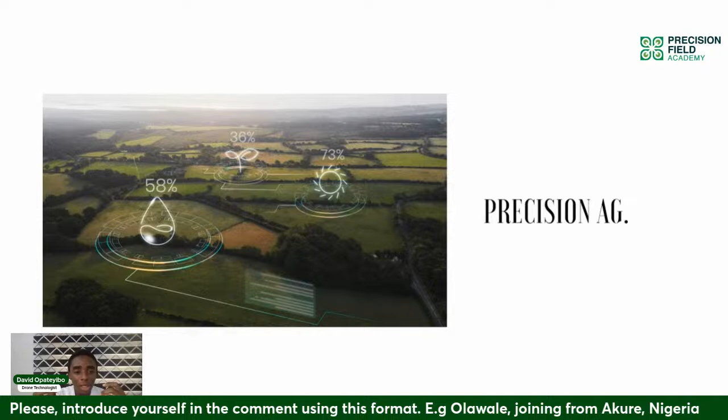Now, this begs the question of how do we meet the demands, especially since traditional methods of providing food cannot really cover even the demand that we have at present. And that's where precision agriculture comes in. Precision agriculture is the strategy that optimizes resources by leveraging technology to increase productivity. So when I say precision agriculture, the word might look vague, but really it just means you're using technology to augment or increase your productivity when it comes to agriculture or whatever it is you are doing.

Now, drones are an integral part of this, and they offer real-time data collection and analysis capabilities that allow farmers to make data-driven decisions and improve crop management practices. In the precision agriculture ecosystem, we have a lot of subparts, for example, Internet of Things, artificial intelligence, machine learning, and the likes. Drones happen to be one of those systems that are being used.

And according to a report by PwC, the market for agricultural drones is projected to reach about 6.21 billion naira by 2025, that's by next year. The demand for agricultural drones is projected to reach 6.21 billion naira. And the reason for this is the increase in adoption of precision agricultural procedures and also the advancements in drone technology.

Now, before we explore further, it's essential for us to understand what drones are and their evolution in agriculture. Okay, so that's what we're going to cover in this section.

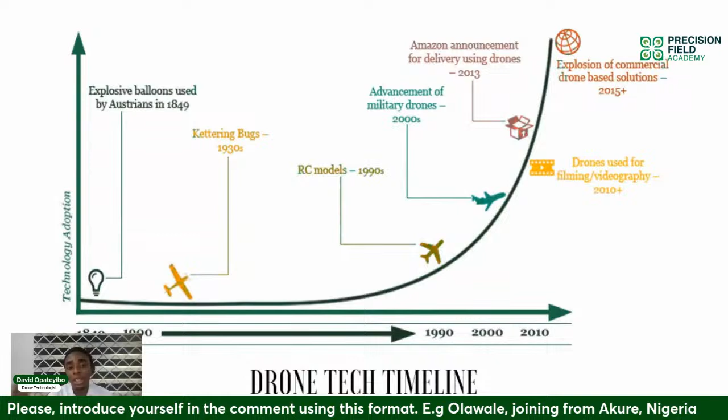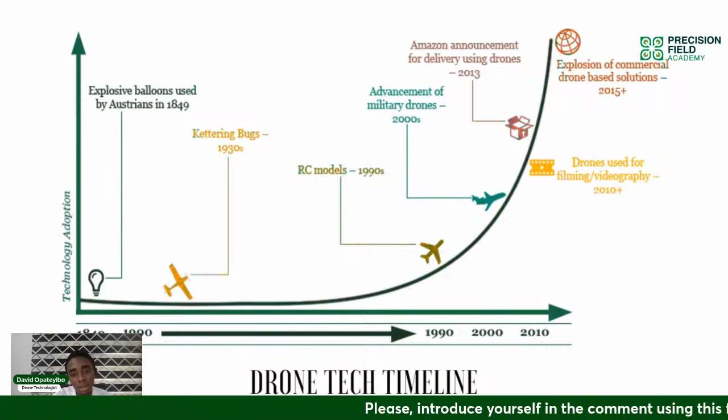Drones were first developed and used by the military in a variety of applications before they were adopted for civilian use, just like many other technologies we use right now, for example, the GPS on our phones. Many of these technologies first came up in the military before they got commercialized and started being used by civilians. So drones also fall into that same category.

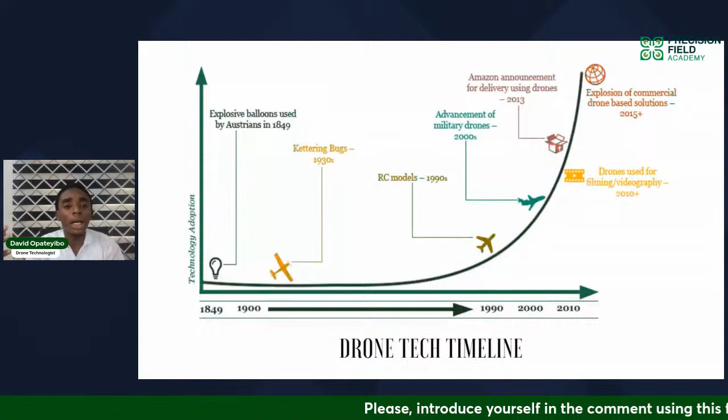Drones started gaining traction in the commercial space in the early 2000s, and since 2015, there has been an ever-increasing demand for drone-based solutions. So it started out in the military around 1849 onwards. Then until 2004, people started using drones for commercial use and every other thing. But then the explosion of commercial drone solutions happened in 2015. Interestingly, drones have been used in agriculture since the early 2000s also, mainly for aerial imagery and mapping.

Now, drones come in different shapes and sizes, and this can be categorized into four. So when we talk about drones, I'm very sure if you've seen any drone before, you notice that one drone looks different from another. Maybe you saw someone using one in a location, and then you saw another type, and you're wondering why all these differences. So it's true that we have different shapes and sizes, but no matter the differences, they can be categorized into four based on their mode of operation.

Sorry, can you see my screen? Yes, David, we can see your screen. Please let me know if you can still see my screen. Yes, I can still see your screen. Oh, I can see your screen. Okay, are you trying to move it? All right, no, my mouse was seizing. All right, so let me just start over, sorry about that. Let's go to— Okay, it's off the screen now. All right, let me just make an adjustment. Sorry about that.

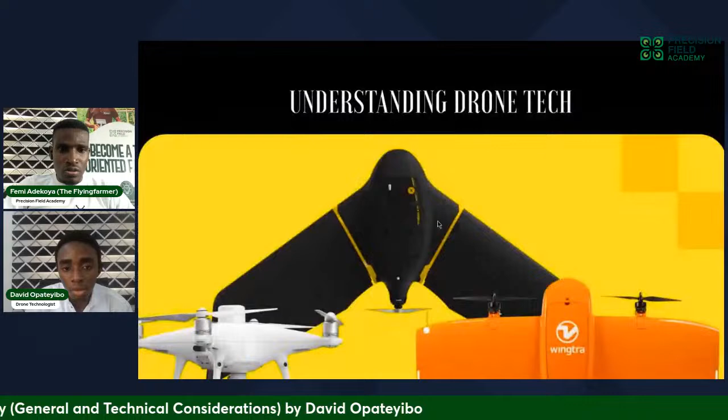So, like I was saying, these drones can be categorized into four different categories based on their function. And they are the fixed wing drones, which is what I'm pointing to now. These drones look like an airplane or fly like an airplane.

We also have the rotorcrafts, which are drones that fly like a helicopter and look like a helicopter. Another one very common in the economy right now is the multi-rotor drones. And then we also have what we call the hybrid drone, which is basically a fusion of fixed wing and multi-rotors. Now, these categories of drones all have their advantages and disadvantages.

For example, fixed wing drones are ideal for large-scale farming due to their longer flight time, while on the other hand, multi-rotors are highly maneuverable, making them effective for detailed mapping in smaller fields.

So there are several options available out there for agricultural operation. But it is crucial to consider a lot of factors when selecting the drone you want to use, including the farm size, the terrain, and the exact task you want to carry out.

Companies like Precision Hawk, Parrot, and DJI, among many others, provide drones specifically for agricultural use. For example, Precision Hawk provides fixed-wing and multi-rotor drones for agricultural applications like crop scouting, farm mapping, and yield monitoring.

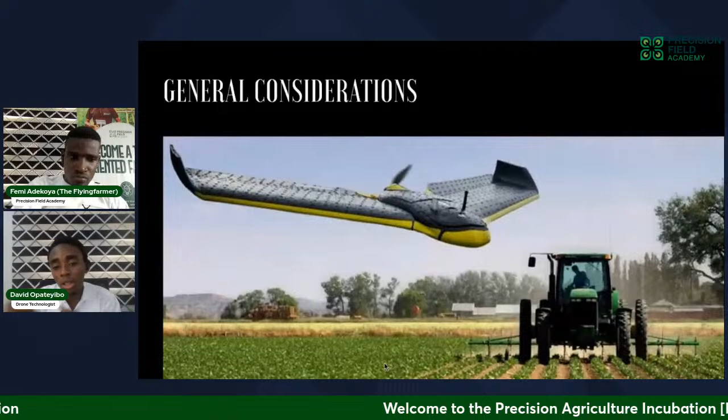One of the critical aspects of using drones in agriculture is navigating the regulation framework. Drones fall under what we call aircraft, and that's under the aviation industry. And in the aviation industry, there are laws that people need to abide by to operate aircraft or flying machines and the likes.

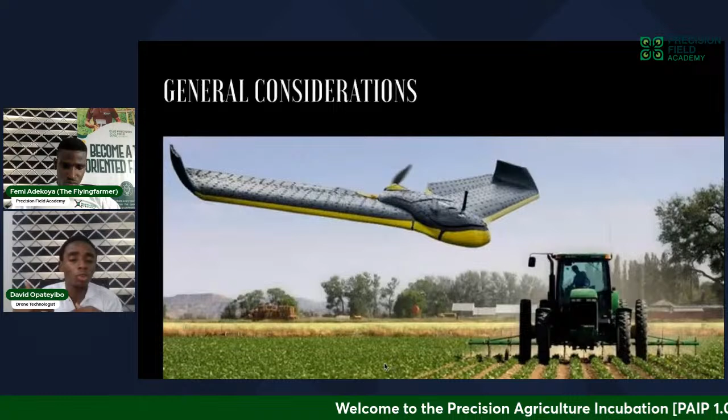So understanding these rules and regulations governing drones is crucial for compliance and for safety. You don't want to be on the opposite end of the law. So you always want to be law abiding when it comes to your operations so that you don't have any issues. And that's why we're going to first consider regulations.

So, regulation frameworks vary from country to country and from region to region, with rules governing stuff like your drone operation, your flight altitude, safety standards, licensing, among many other things. Now, here are some general rules guiding drone operations globally. Even though there are differences, some of these laws apply globally.

For example, you cannot fly your drone above 400 feet, that is 120 meters above ground level. So if you need to fly your drone above that altitude, you need to request a waiver or permission to do that.

Another thing is you're not allowed to fly close to airports or in restricted zones like a president's lounge and every other thing, where we have high dignitaries, or where we have wildlife, in some instances trade zones or where aircraft operates with a high rate of commercial aircraft operations. You don't want to fly in these particular locations.

We also have regulations for registering your drone if it weighs above 250 grams, getting a commercial pilot license if you are using drones to make money, among many other things.

Now, the Federal Aviation Administration, which is called the FAA, is responsible for regulating drone operations in the United States of America. Their law is called Part 107, and it requires pilots under that framework to get their license, their pilot certificates, and then follow airspace restrictions and regulations.

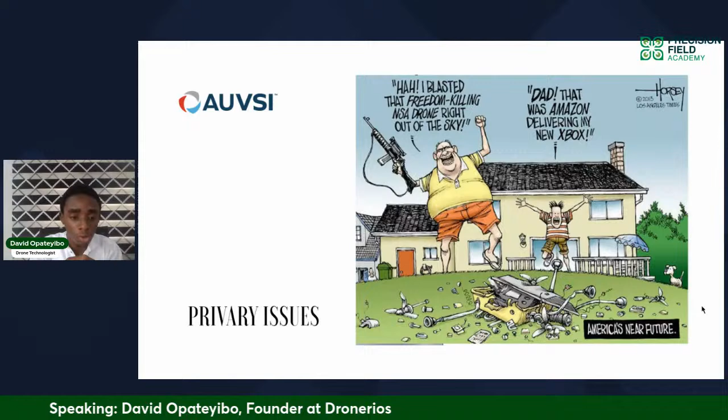According to a study by AUVSI, the Association for Unmanned Vehicle Systems International, over 80% of drone operators believe that complying with drone regulations has a positive impact on public perception and acceptance of drone technology. These laws are put in place not just to safeguard the community, but also to safeguard you as a pilot, and to allow the drone industry to boom and grow as it's supposed to.

Now let's delve into technical considerations, the technical aspect of drone technology. The very first thing you need to know is that another name for drones is UAV, which means unmanned aerial vehicle, simply because there is no human being inside the drone. The pilot who operates the drone does not stay inside, but operates externally.

These drones, the UAVs, are part of what we call the unmanned aircraft system framework. In this framework we have the drone and many other accessories, including your navigation system. So you have the drone, and you need something to control it, for the drone to navigate you have a navigation system, and you have your communication system to control the drone.

You have your data link that allows the communication system to speak with the drone, and your payloads, among many other things. The drone itself can also be divided into different parts, like the airframe, the propulsion system, the flight control unit, the onboard computer, the communication module, the payload, and also the power system.

For example, many drones operate with motors and are battery powered. We also have drones that make use of fuel and internal combustion engines, and drones that make use of hybrid electric power and hydrogen power supply. So there are a lot of systems or things that you need to put in place.

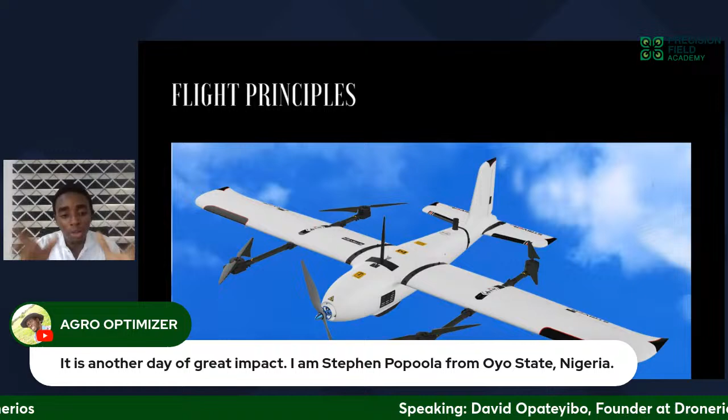At the heart of every drone flight, all drone operations you see out there are backed up by four fundamental forces. These forces are lift, weight, thrust, and drag. These forces govern how drones move through the air and maintain stability during flight, and together they are a subset of what we call basic aerodynamics.

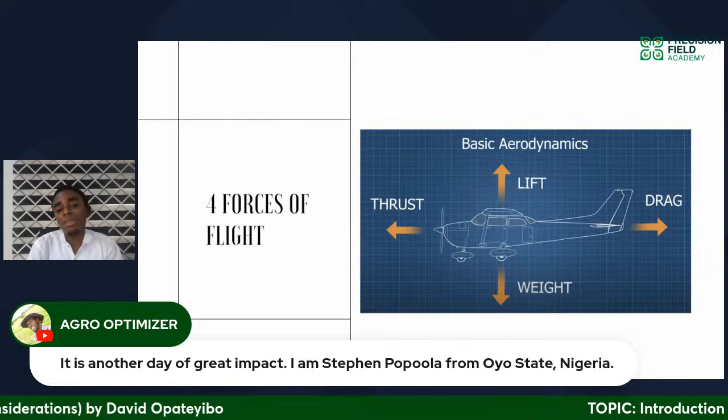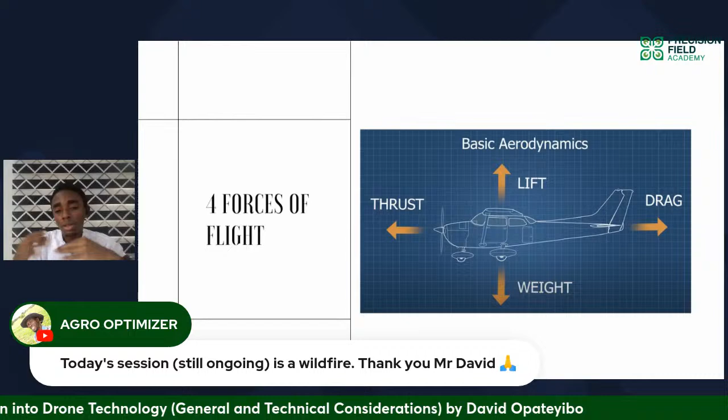Aerodynamics might sound strange to you, but it's simply the study of how objects interact with the air when they move relative to one another. For example, if I have a static object and air blowing through it, how do they interact? If I have calm air and an object moving through it, how do they interact? The study of how air interacts with an object is called aerodynamics.

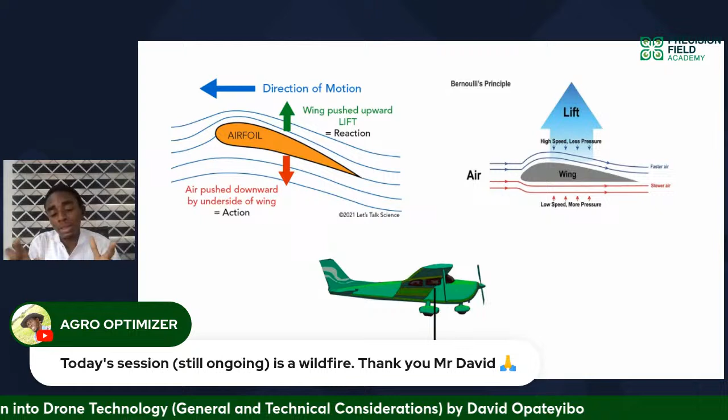So like I said, we have four forces of flight: lift, weight, thrust, and drag. Let's talk about lift. Lift, like the name implies, is basically the force that allows the drone to ascend, to lift off the ground, to overcome gravity and stay airborne.

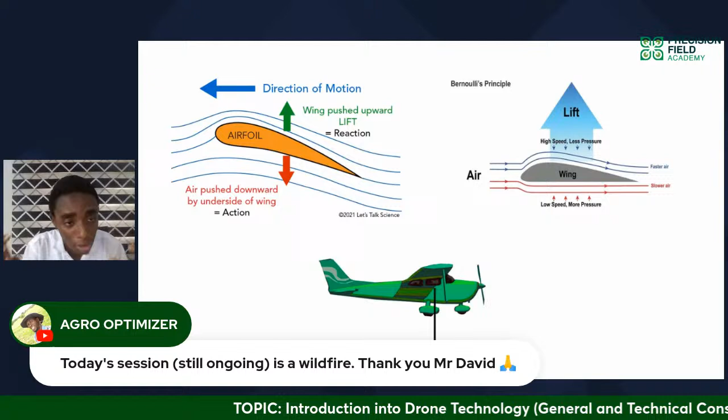Now, lift is generated through a lot of principles. We have two major principles that guide how lift is generated: the very first one is Newton's third law of motion, and the second one is Bernoulli's principle.

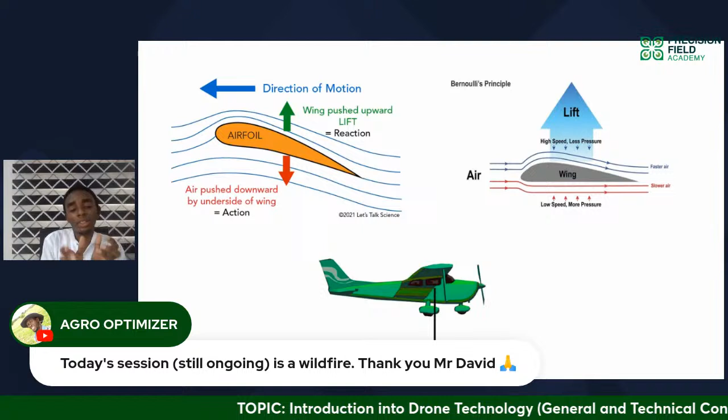Let me explain Newton's third law of motion. Newton's third law of motion states that for every action, there is an equal but opposite reaction. This means that, for example, if I punch you, there's a high tendency for you to punch me back. My action is punching you, your reaction is you want to punch me back. That's pretty much it.

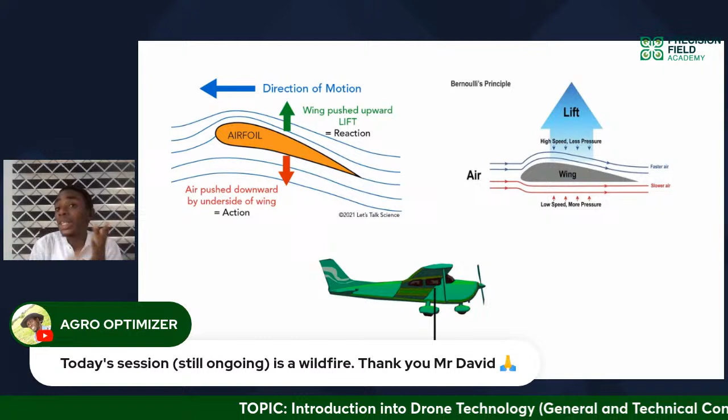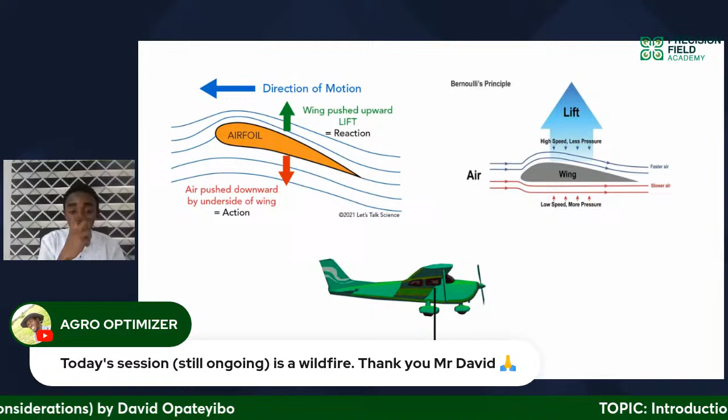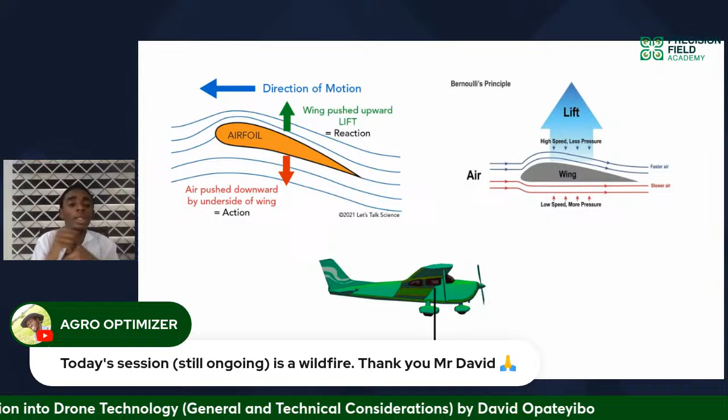Now let's bring it to flight. For your aircraft to fly, they have wings, propellers, and rotor blades. Your airplanes have wings, just like birds have wings. Helicopters have a rotor blade which spins on top. We also have propellers, which are mounted to aircraft engines, or we have turbofans or turbojets. The way these fans, blades, or wings are shaped is called an airfoil shape.

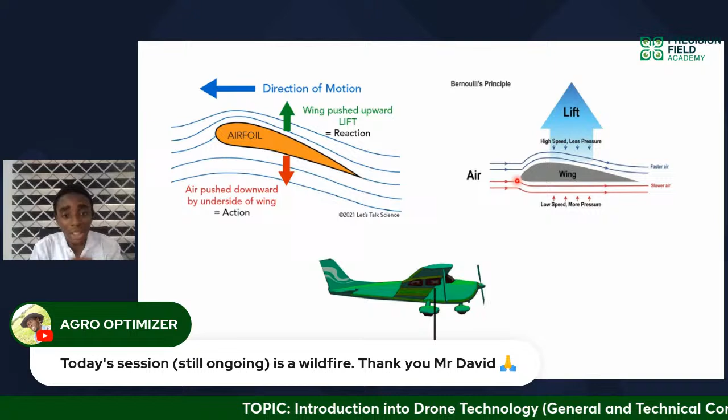It's called an airfoil shape. So this is, for example, the cross-sectional area of a wing. It's an airfoil shape. When you look at it from the cross-sectional view, what you will note is that the bottom is mostly flat, and then the top section is curved.

Now, what this means is that for Newton's third law of motion, for every action, there's an equal and opposite reaction. Because this top is curved and it's curved downwards, when the airplane begins to run on the runway to take off, air begins to flow over these wings, just like you put your hand outside while running and you feel the breeze trying to blow you.

Now, as air begins to flow around this airfoil, because the top of it is curved, the airflow is deflected downwards. So the air is pushed downwards because it's curved. Now this airflow going downwards creates a reaction that pushes the aircraft upward. And since that wing is attached to the body, the airplane lifts off. That's how you get lift.

Now that means the lift, which is the reaction generated, the upward force, has to be greater than the weight of the aircraft. Once that is achieved, your aircraft lifts off the ground and then you are airborne. So because the shape is curved, the air is deflected downwards, which is the action. The reaction is an upward pushing force, and that lifts the wing upward for you to fly.

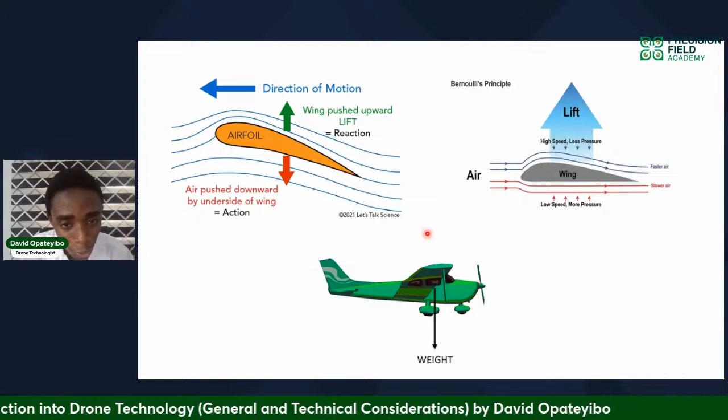Let me give a relatable example. Let's say you are in a confined building with 10 people, and then all of a sudden there's a fire outbreak. There is just one door, and everybody wants to run out. Now, if all of you hold yourselves together and start pushing through the door, you people are going to come out slowly, because all of you are applying a lot of pressure on that door, and your speed, your velocity, is going to be slow.

But let's say you have to come out in an organized manner. It's just one door, then immediately all of you line up and start going one after the other. You're going to come out of that building faster, but you have applied less pressure on the door because nobody is fighting, nobody is pushing anybody. So basically, if the pressure is low, the speed is high; if the speed is high, the pressure is low.

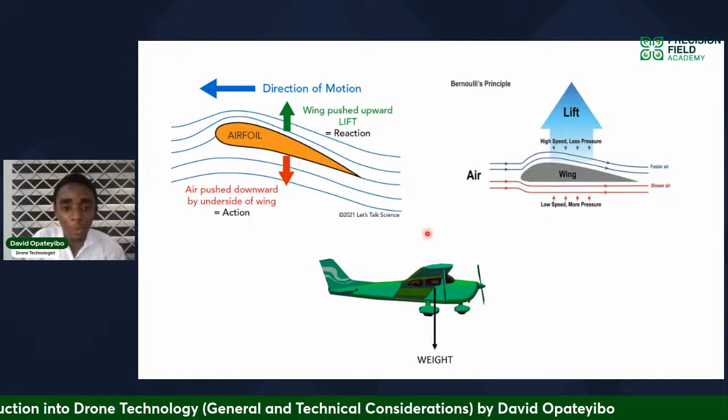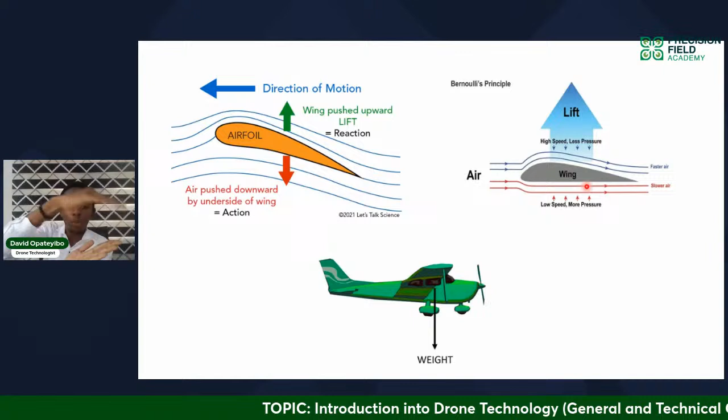So how does this relate to an aircraft wing? You have an aircraft wing, and air begins to flow. You have an upward section which is curved, then a lower section. Because the top of this wing is curved, the air speeds up. It's like going down a slope, for example if you're riding a bicycle through a downslope, your bike accelerates because your velocity automatically increases.

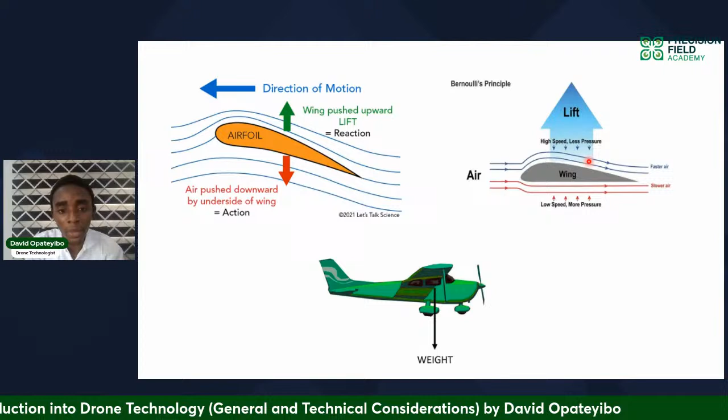So that's what happens. Because the wing is shaped downwards, the speed at which air flows over that surface is faster. Because it's faster, there is low pressure generated at the top of the wings. But at the bottom, because it is flat, the speed is slower compared to the speed at the top.

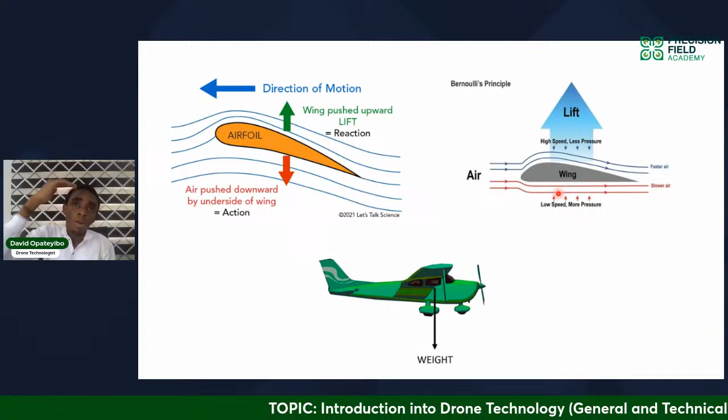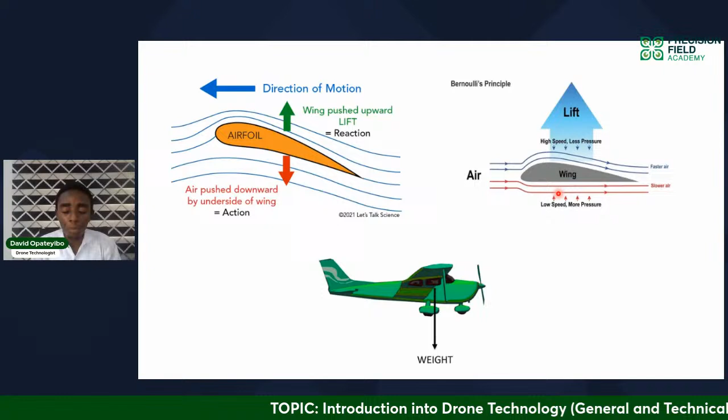And that creates a pressure difference. At the top, you have high speed, low pressure, because the air is flowing fast over it. But at the bottom, you have low speed, high pressure. Now that high pressure at the bottom is going to push that wing upward.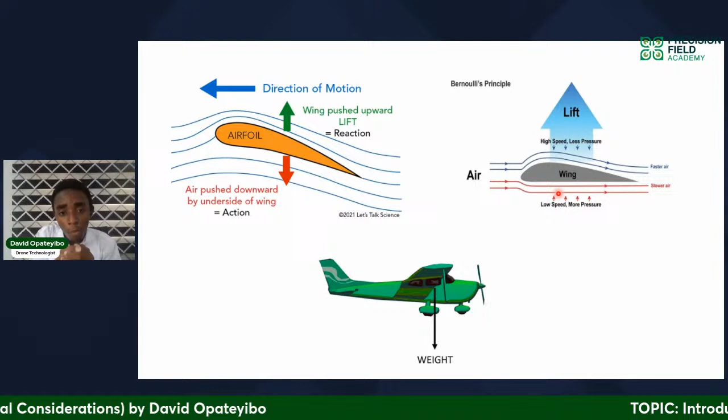It's more like you have people dragging a rope, doing a tug of war, right? The person that has more power will pull that rope or item to its own direction. So because you have low speed here, I have more pressure here, and the pressure is going from the bottom of the wing upwards. It pushes that wing upward, and then you have lift off.

Now, in the lifting principle, what happens is basically these forces, once air begins to flow, and you have the differences and every other thing, it overcomes the weight of the aircraft, which is a result of gravity, and then it's lift off.

Now, weight is simply the opposite of lift. So if lift is going up, then your weight and every other thing is coming down. And as we already know, weight is basically the force that pushes or pulls an object to the surface of the earth due to its mass and due to gravity. So because of gravity, what goes up must surely come down.

So for your aircraft to stay airborne, the lift force generated by the wings, by the rotor blades, has to be greater, and then you have that lift. Now, when your weight and your lift are at equilibrium, your drone, your aircraft in this case, does not ascend or descend. So let's assume you have your drone here, and then it begins to fly.

At the point where it lifts off the ground, what happens is that the lift is greater than the weight. Now, when the lift and the weight become equal, let's say it's up here, and the lift generated is equal to the weight. So let's say you have a 20 kilogram aircraft, and you generate a lift of, let's say, 30 kg for it to come up.

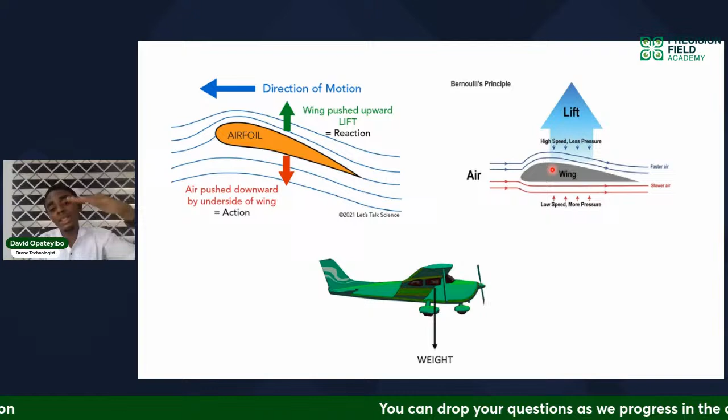Once it comes up, if the lift reduces to the weight, that is, you now have the lift at 20, the weight at 20, what happens is your aircraft stays on that spot. This is what we call equilibrium. Your aircraft stays on that spot. Now, if the lift generated becomes less than the weight, your aircraft begins to descend.

Now, the more the difference, the more the reaction. That is, if the lifting force is way more than the weight force, your aircraft begins to ascend very fast. If the lift force is only a little higher than the weight force, your aircraft ascends slowly. If the weight is way more than the lift generated, your drone is going to descend rapidly. If the difference is only a little, but the weight is more, your drone is going to be descending slowly.

That's pretty much it, I hope that makes sense. So lift is the force generated due to the surface of your wing, your propeller, and every other thing. This shape is called an airfoil shape, where you have a flat surface at the bottom and a curved surface at the top. To generate lift, we use Newton's third law of motion: for every action, an equal and opposite reaction. So because air is going downwards, the reaction will pull the wing, or the blade, or the drone upwards.

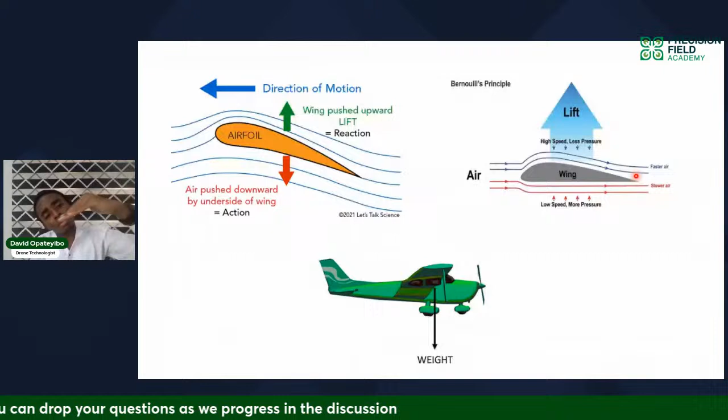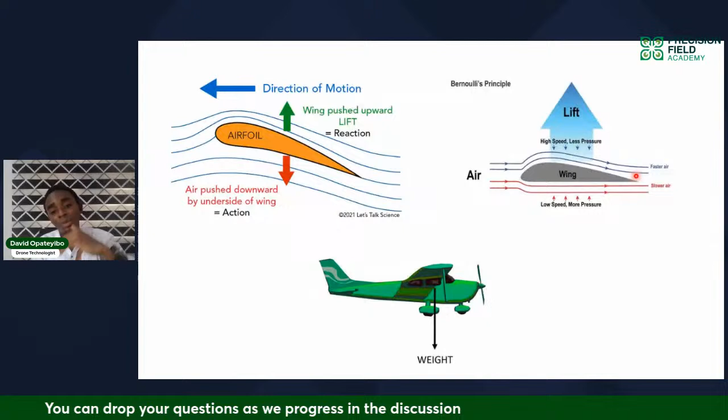For Bernoulli's principle, because we have high velocity on the top, we have low pressure there, and we have higher pressure below. The low pressure lifts against the high pressure at the bottom. The high pressure at the bottom lifts the wing upwards.

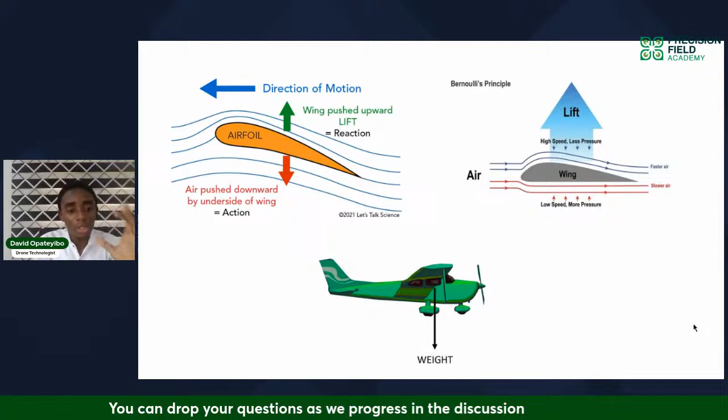Now that brings us to the other forces. These forces are counteracting each other. So the lift is counteracting weight, and then the next force we have is thrust and drag. Thrust and drag are also opposing forces. Thrust is the forward force generated by the drone's propeller.

So let's say you have your fixed wing drone, for example, or let's take an airplane, for example. Your airplane has these two engines, these big engines attached to it that rotate. Now, as they begin to rotate, what happens is that they deflect air backwards.

Because propellers deflect air backwards, which is the action, the reaction is that the aircraft begins to go forward. Just like Newton's principle - every action has an opposite reaction. So assume you took lift and weight like this, and then you just flipped it - your lift now pushes your aircraft forward. This time we call this kind of lift thrust. Thrust is the forward force generated by the drone's propeller, and it propels it through the air. The thrust must overcome drag for your aircraft to maintain forward motion, so the thrust, which is a forward force, counters drag.

So then what is drag? Drag is a resistance encountered by the drone as it moves through the air. If you've heard about friction, we say friction is the force which opposes motion. Drag basically is what slows down or tries to impede movement, and it's mainly caused by the surface of the aircraft. You have a shape trying to move through the air, and there's air colliding with the body of that object. Because it's colliding, it's slowing it down. So drag is that force that tries to push or resist movement through the air. It's caused by friction and rough surfaces and every other thing. It acts in the opposite direction to thrust and must be overcome to maintain forward motion.

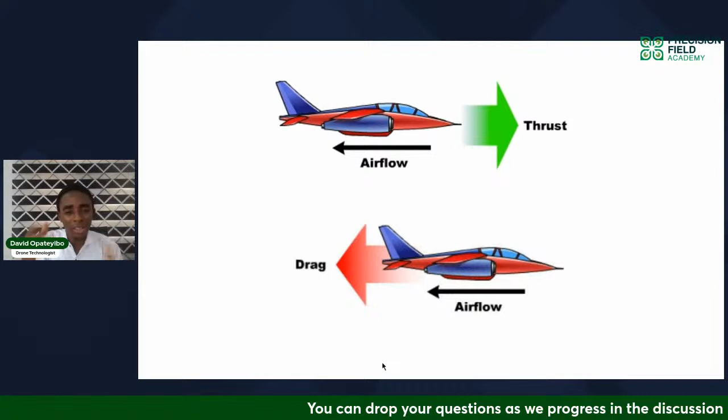I don't know if you've encountered this before - if you hold a flat board and begin to run with it held flat, you notice there's a pull trying to slow you down, because of the wide surface area, a very big barrier. But instead of holding it flat, try holding it edge-on - because you have less surface area, it moves faster through the air. That's the reason why jets are shaped differently from other aircraft - they're more streamlined to reduce friction. Same thing with sport cars and every other thing. I believe that allows you to understand the concepts better.

So let's move over to the next thing, which is the three axes of flight. Your drones have the ability to move in three axes - we live in a three-dimensional world, so your drone can move within those three dimensions or three axes.

So the very first one is your pitch, or your lateral axis. So these are to explain the axis - just imagine you have an aircraft here, or a drone here, and there's an imaginary line that cuts through from left to right. I think this is a good example. Can you see this?

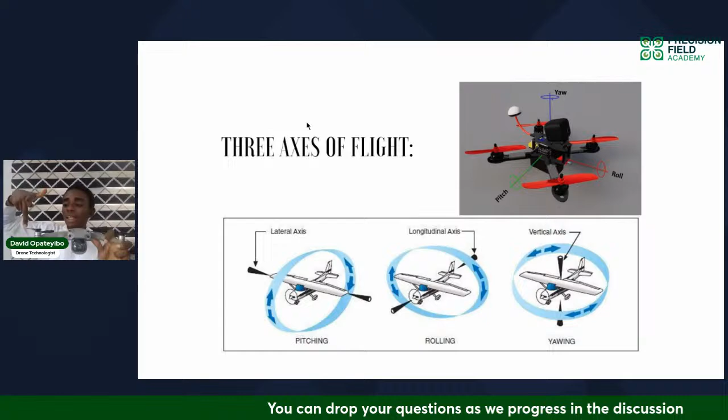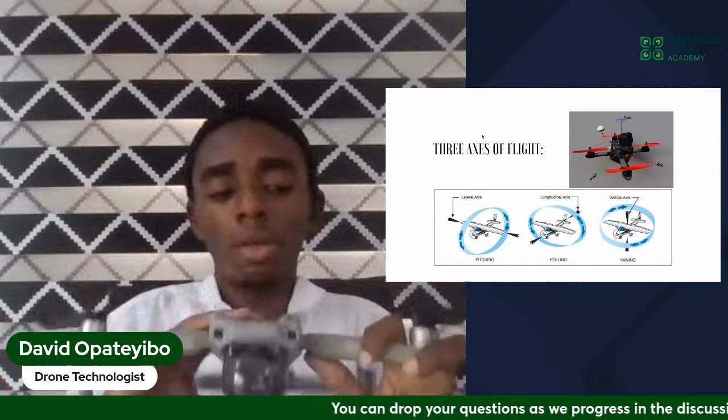Assume you have an imaginary line that cuts through from the right side to the left side, whatever way that cuts through. This means your drone can move this way or that way, this way or that way. That's the pitch - nose down, nose up, front down, front up. More like you're nodding your head. That's the motion, you can nod your head. So that is pitching, and there's an imaginary line here - it's around this line that the aircraft is moving.

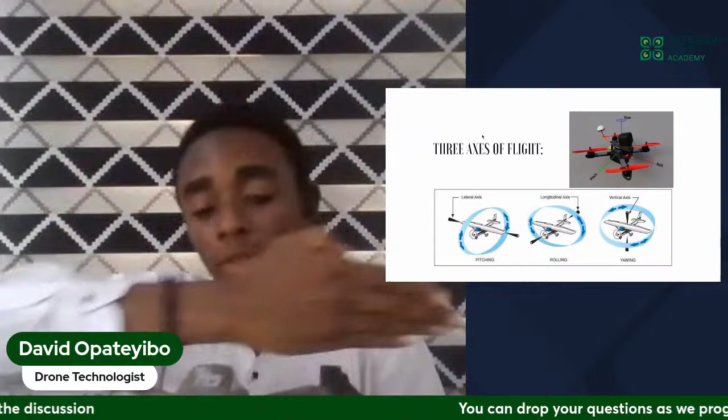Now the next one is the roll axis, or what we call the longitudinal axis. Longitudinal axis simply means from the forward to the back of the drone. You have your longitudinal axis. If I have an imaginary rod passing through here, it means my aircraft can either roll in this direction or roll in this direction - roll here, roll here. So that's what roll is. Roll simply means you're moving your drone this particular way, this way and then this way.

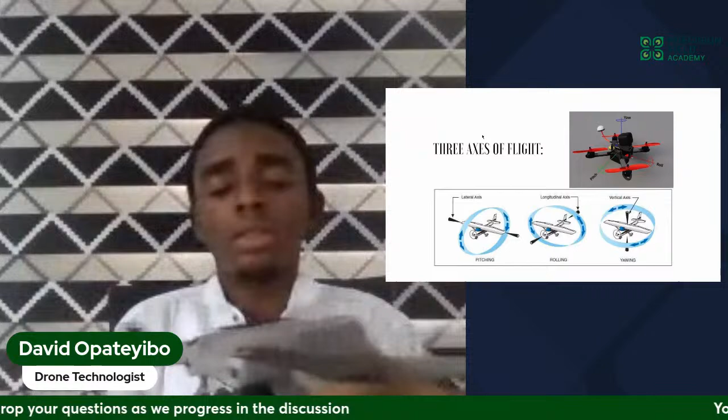That's the roll axis. And then the last one is the vertical axis, or what we call the yaw axis - the vertical or yaw axis. This simply means you have a rod vertically, and that means your drone can turn this way. So this is the yaw motion.

And then we have the pitch motion, which is about the lateral axis, which is side by side. You have a line side by side, so the drone can only go this way. Now with the roll axis, and then you have a vertical line, which means your drone can move about this direction. That is your yaw axis.

For yaw, you're turning the drone left and right, more like you're facing front, then you face right, face left. That's your yaw motion. Like I said, your pitch motion, liken it to nodding your head - nose down, nose up, nose down, nose up. And then your roll motion is simply turning your head, touch your shoulders, right and left. That's your roll motion.

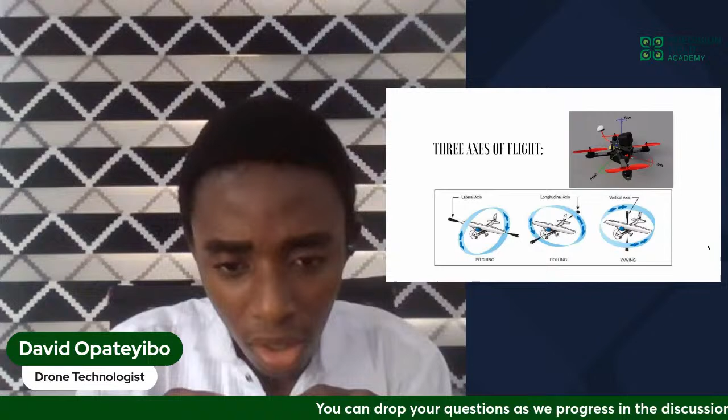So different types of drones exhibit variations on how they control movements across these axes. Fixed wing, for example, makes use of what we call control surfaces, to control the deflection, to deflect air and allow their movement. While multirotors make use of what we call speed differentials, or thrust differentials - we're adjusting motor speed, but we'll talk more on that.

So let's go to the next thing - drone operations. In this section, I'll delve into the world of drone operations, how drones are operated, how drones fly. The first thing we start with is how we control multi-rotor drones. Like I already said, the way fixed wing works is the mix of control deflections on the surface to deflect air. For multi-rotors, it's what's called thrust differentials or speed differentials.

That means we have 4 controls because of all this we have said. We have our pitch, which I spoke about before when explaining the 3 axes of flight, which is nose up and nose down. So for your pitch control, you have your nose up and your nose down. We have the throttle - okay, I've gone ahead of myself. So we have the pitch control, nose up and nose down. We have the roll, which is turning your drone left and right.

And then we have the yaw, which is twisting your drone like this. And that gives us the 4th one, called throttle. Your throttle control is basically a control that allows you to ascend and descend - climb up, climb down. So you basically have 4 movements now: the 3 axes gives you 3 movements - pitch, yaw, roll, each of the 3 axes, the Y, X and Z axis - and then you have 1 extra, which is the movement up and down. That gives us the 4 controls. So now in this section, we'll be looking at how multi-rotor drones are controlled.

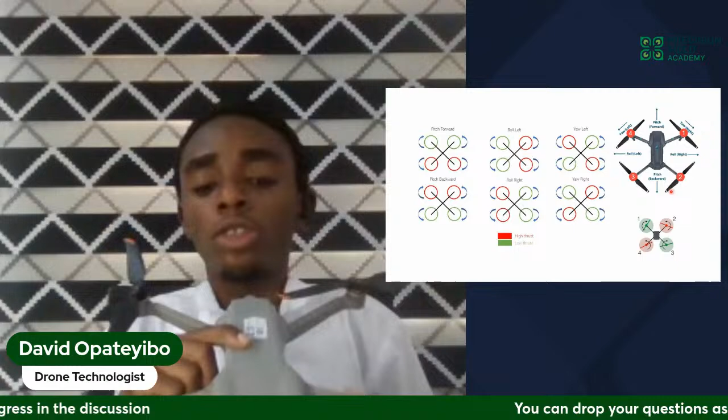Now that brings us to the next one, which is your pitch control. Basically, when your drone is pitching forward, it goes to the front, it moves forward. So it's pitching forward, it goes forward. It's pitching back, it goes backward. So how does it do that?

We have the forward motors and the backward motors. Let me use the diagram here to illustrate: you have the forward motors and the backward motors. Note this - the color red on these images means high speed, danger, high speed. The color green means low speed, safe. Just take it like that.

For forward motion, the motors at the front are reducing in speed equally, while the two motors at the back increase their speed equally. Because the motors at the back are rotating faster, they generate more lift than the motors in front. So if I have more lift at the back, the back of my drone comes up and lifts up, so the forward side descends, goes down. This creates movement, and my drone begins to move forward.

The reverse happens when I am pitching backwards. So when I'm pitching backwards, the forward motors increase in speed, while the backward motors decrease in speed. So we have this forward motion going this way, then backward motion going that way.

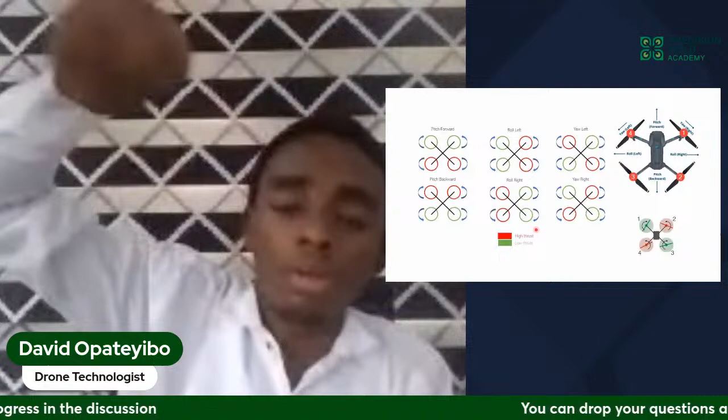Let me explain. So for your drones now, you have a blade that is rotating. This blade can either rotate clockwise or counterclockwise. It can only rotate in one direction. So let's assume it is rotating in a clockwise direction.

What do you think is going to happen if you make reference to Newton's third law of motion that I was talking about before? Because this is rotating clockwise, there is going to be an anti-clockwise reaction, which means the body of your object wants to rotate in the opposite direction of the rotation. So for your helicopters, they attach a tail rotor to counter it, providing that stability. Now for your multi-rotors, we have an equal number of blades that rotate clockwise and an equal number that rotate anti-clockwise.

Look at this diagram here, this explains it better. We have 1, 2, 3, and 4. Notice that diagonally we have two different rotations. 2 and 4 rotate anti-clockwise, while 1 and 3 rotate clockwise. Now if everything is rotating at the same speed, it means they're countering their effect.

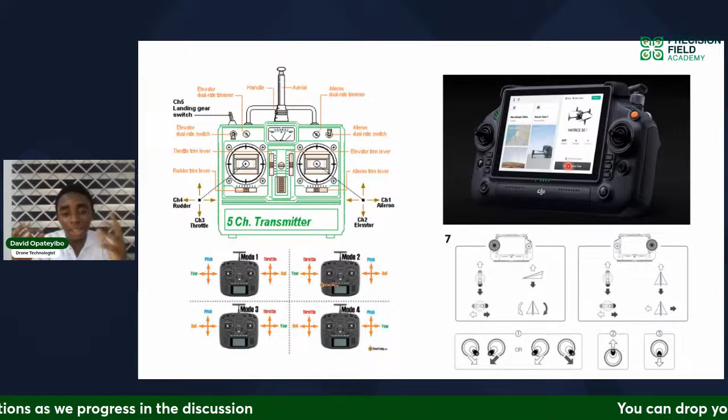So basically it's more like a PS2 pad, like a Game Boy pad. You have joysticks on it, and a lot of buttons. Each of these controls - your throttle control, your pitch control, your yaw control, your roll control - is assigned to a channel. I will explain that. It's assigned to a channel.

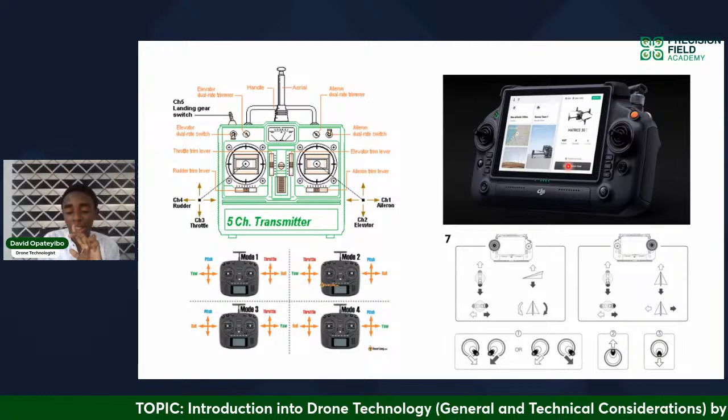Now, if each control is assigned to a channel, that means I need at least 4 channels on my controller. 4 channels just means 4 buttons, or 4 controls, 4 movements. So I have the throttle channel, the pitch channel, the roll channel, and the yaw channel. So at a minimum, for all multirotors out there, I need to have 4 channels.

But the thing is, transmitters usually have more than 4 channels. These other channels allow you to do other things. For example, you can have a channel that allows you to control the landing gear of the drone, if at least it has a retractable landing gear or retractable wheel.

Or maybe you have a channel for, let's say, a light - for turning it on and off. For example, if you are using an agricultural drone like one that dusts crops, you have a channel that allows you to turn the pump on and off. If you have a camera attached to your drone, you have a channel that helps you capture pictures or video, or a channel that allows you to move the camera up and down, left and right, like many other things.

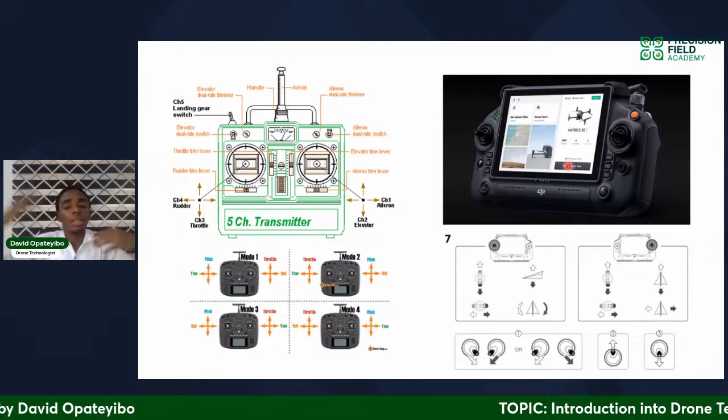So you can have an 8-channel transmitter, a 16-channel transmitter, a 12-channel transmitter, it doesn't matter. The minimum is that you have 4 channels: your throttle, your yaw, your pitch, and your roll. These are usually assigned to a joystick.

So if you look at this picture on my slide now, this is an example of a transmitter. You have this joystick here, and this joystick here - so you have 2 joysticks, the left joystick and the right joystick. The thing about these joysticks is that they can move up and down, left and right, both of them. So you have 4 movements.

Up and down here is 1 channel, left and right is 1 channel. Up and down here is 1 channel, left and right is another channel. So that's pretty much it. This is a transmitter, for example.

Let me explain it. If you look at this one now, you see channel 3, throttle, which means the up and down of this button - this joystick taking it up or bringing it down is 1 channel. Channel 4 here, if you look at it, says rudder. So if you take this left and right, you have the rudder control, which is basically your yaw - turning your drone left and turning your drone right.

Now this is on the left button for this one. Now on this right button, you have an aileron channel, which is your roll channel - left and right, which means roll right, roll left. And then you have your elevator channel, which is pitch forward and pitch backward.

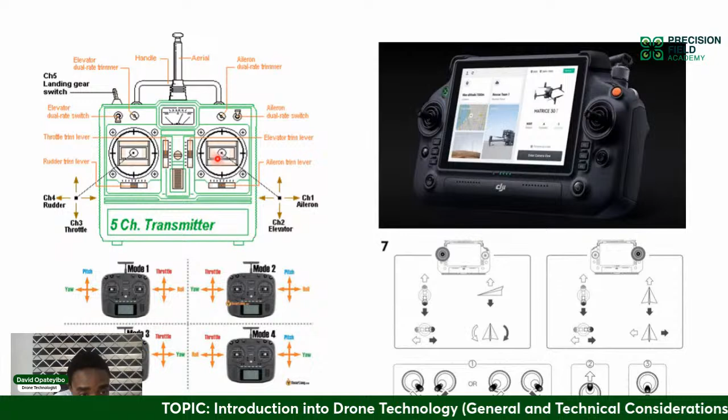But now we have other modes, where mode simply means the arrangement of these controls. Look at this image here. What I just explained is a mode 2 transmitter. You see throttle, which is channel 3, and your other channel 4, and that happens on one spot. So that is your left joystick.

Now your right joystick, you have pitch, which is go forward and go back, and you have left and right, which is go left and go right. It's exactly like this: aileron, which is your roll, left or right, and elevator, go forward or backwards, on this other controller.

But look at this mode 1 transmitter. What you'll notice is your pitch, up and down, is here, but your yaw is also here. So what they did was take the pitch controls that we have on the right stick and moved them to the left stick, and the throttle that was on the left stick, they moved to the right stick. Basically, now this is move forward, this is move backward, this is turn on the spot, this is go up, go down, and this is roll left, roll right. So the arrangement of where those controls are has changed.

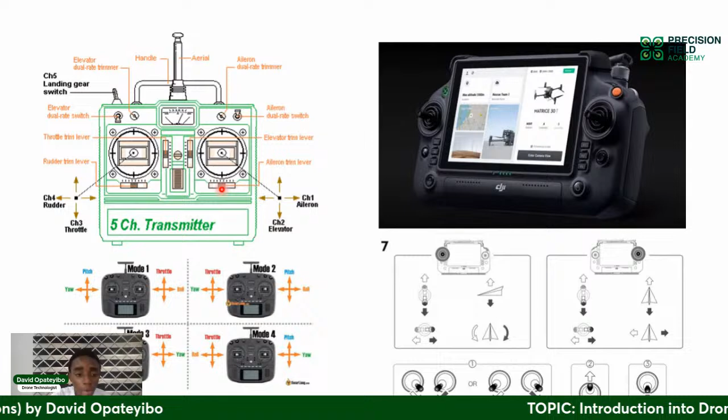We also have mode 3 transmitters and mode 4 transmitters. Mode 2 is the most common, especially in this realm. In some European countries like Germany, mode 1 is common, but mode 2 is common here, so let's stick with that, don't complicate it. So your rudder and your throttle, your yaw and your throttle, are controlled by the same stick, which is the left stick, and that control is for on the spot. This other control is for things that move your drone.

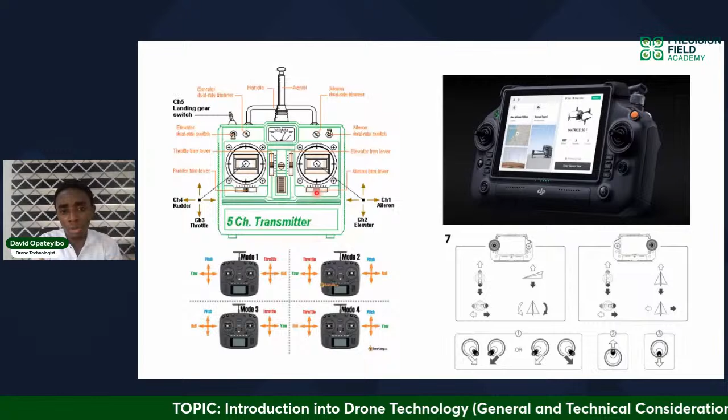So forward and backward, which is your pitch, is the drone going far away from you or coming towards you, for example if you are facing the same direction as the drone, or the drone going to your left or right, if you are facing the same direction as the drone. Hope you hear what I said. If you are facing the same direction as the drone. So if this drone is facing the same direction as I'm facing, when I say go forward with my right stick, the drone goes forward.

Every time around, it is with reference to my front. If I say go backward, it comes to me. If I say go right, it goes to the right, which is also my right. If I say go left, it goes to the left, which is also my left.

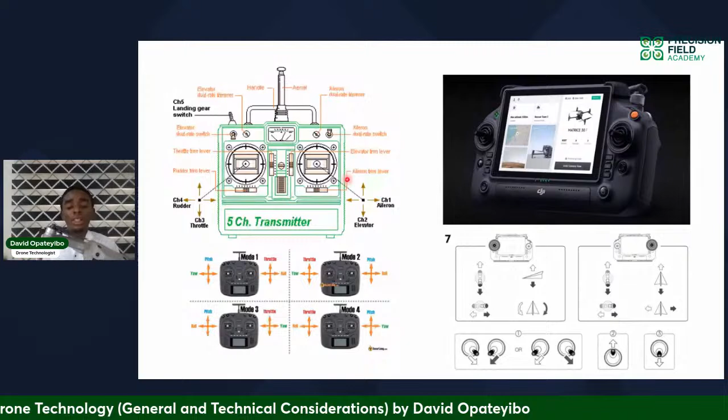But now let's say, for instance, I turn this drone this way. So now this drone is facing my right. Okay, so now this drone is facing my left right now. So if I say go forward, what happens is that this drone goes to its own front. Can you listen to that? It goes to its own front, not mine.

So when I'm controlling the drone, I'm controlling it with reference to the drone and where the drone is facing. If I say go front now, the drone is going to its own front, but that is going towards my left. If I say pitch backwards, the drone is going to go back, but that back now is to my own right.

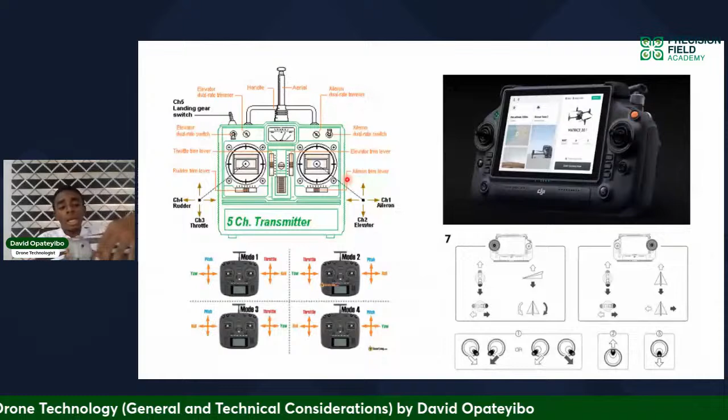If the drone were to face me, for example, and I tell the drone to go front, since it's facing me, it means it's going to come towards me, going front. If I say the drone to go back, it's going to go away from me, because away from me is the back of the drone.

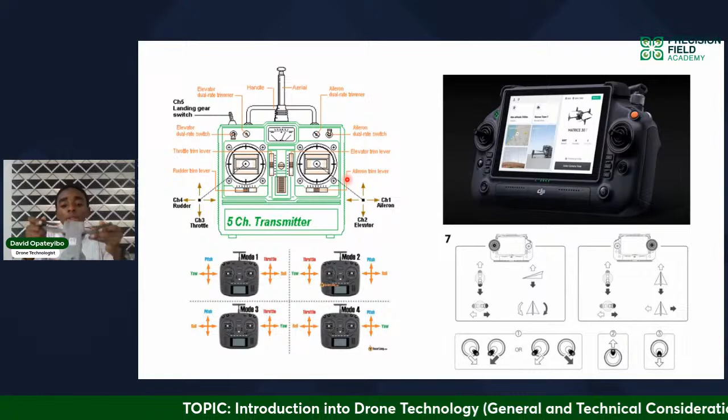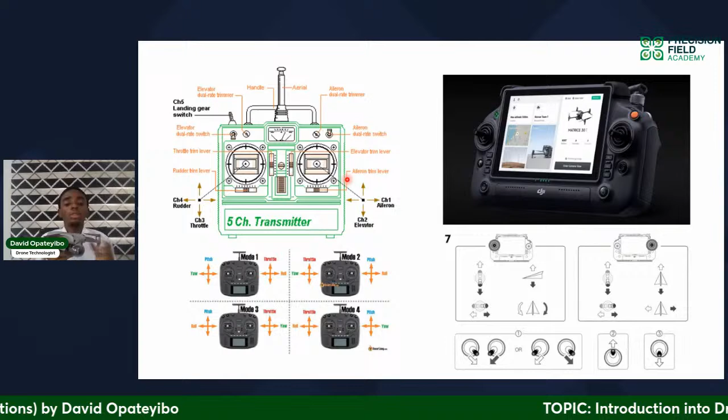Same thing for your roll. If I say roll to the left, and I'm facing the same direction as the drone, it goes that direction. So I say roll left, the drone rolls to my left, which is also its left. I say roll right, the drone rolls to the right, which is also its right.

If the drone were to face right, facing left like this, if I say roll right it's going to go to the drone's right, but that's far away from me. If I say roll left, it's going to go to the drone's left, but the drone's left now means the drone is coming towards me. I believe that makes sense, right?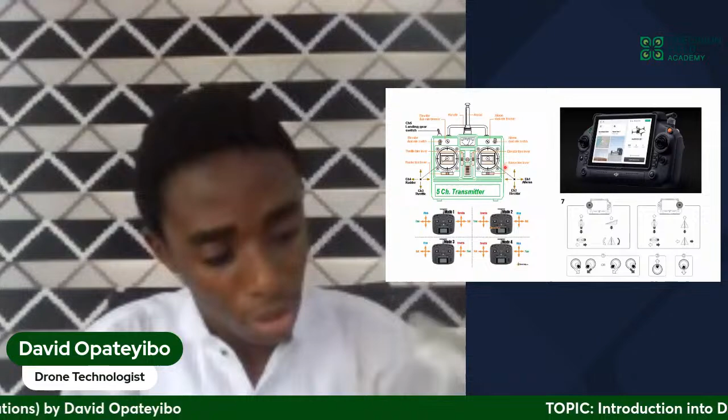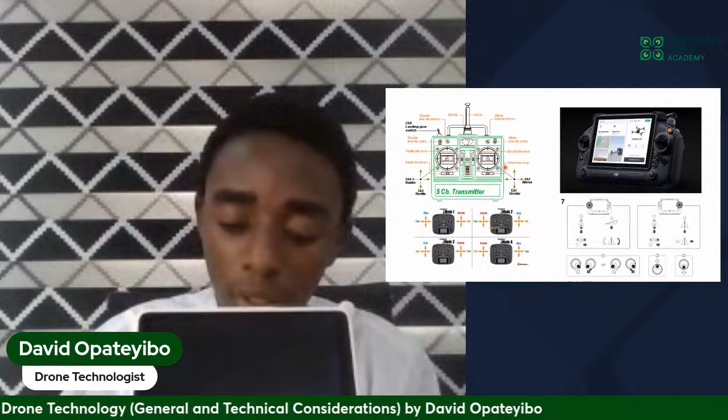So let me just show you what a typical transmitter looks like. I have one with me. All right, so this is a transmitter for one drone. Now you see that I have two joysticks here, and two buttons here. So this stick, right now with the drone facing me like this.

This stick controls my throttle, a mode 2 transmitter. So just reference this: mode 2 transmitter, this controls my throttle, and this controls my yaw on the same spot. While this controls my drone going forward, drone going backward, and then it also controls going left and going right. But if you see also, I have other buttons here, and all these are assigned to other functions on the drone. And then, of course, this particular controller has a screen that allows me to use an app just like this particular one. So the joystick allows me 4 channels: drone go up, go down, go left, go right.

Now, here's the thing: the farther away I move from the center, so see the center as 0, the faster the drone responds. Remember when I was talking about lift and weight? I said the more the lift, the faster the drone will climb. The more the lift compared to the weight, the faster it will climb. That's basically what this allows you to control. So this controls your throttle.

This is your throttle, which is fine. But if you raise it up, I arm my drone and then I say I fly and then my drone is on the spot. If I take this just up a little, because the lift is now more than the weight, the drone will begin to climb. But because it is just a little difference, it climbs slowly. Now, if I take it all the way up, it means I'm generating the maximum amount of lift I can generate. Because that difference now is higher than the weight, way higher, it's going to climb very fast.

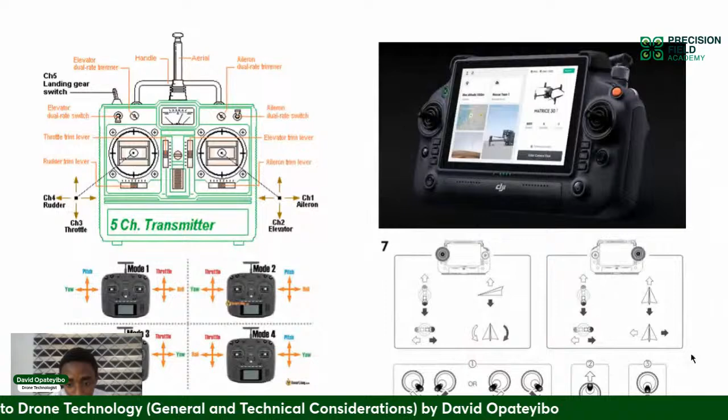All right, now this brings us to what we call flight modes and fail safes. Now when it comes to drones, I've already stated, we have drones that are built for different categories of drones, first off. Now the thing is, even within the categories of drones, we have drones that are built for different things.

So we have a drone, for example, that is carrying a camera, an RGB sensor. But now you have another drone that is carrying a spreader or a sprayer. And then you have another drone that is carrying a drop mechanism. Now, each of these payloads that it's carrying means it can do different things.

Now, sometimes what happens is that the manufacturers, based on the function these drones perform, create flight modes that are suited to those operations.

Now, apart from your regular control, now you can have these assisted modes or automatic flight modes, or should I say intelligent flight modes, which make use of artificial intelligence. Intelligent flight modes that allow you to control the drone, or that allow the drone to perform a function automatically all by itself. Now, also about what we call fail safes.

Fail safes are simply like safety settings or safety modes that are included into the drone to prevent accidents or incidents and many other things. Now, let's just take a look at some of them.

All right, so for example, we have what we call manual mode. Now, many drones are equipped with what we call a global positioning system, a GPS, just like a GPS on your phone. It allows you to track its own location. So you have a drone with a GPS, which means when you turn it on and leave it on the ground for a while, it gets connected to satellites.

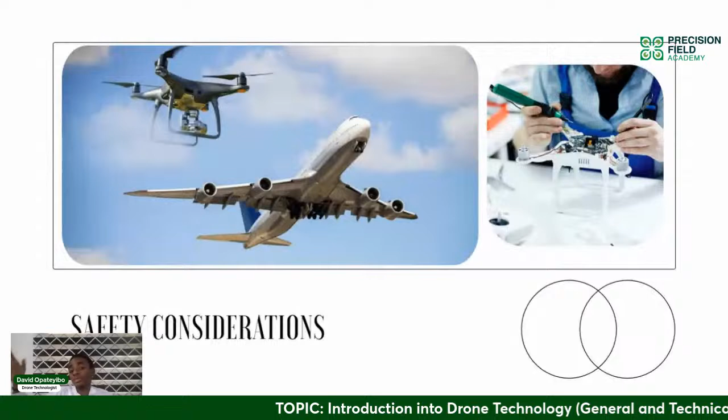Another thing is to avoid restricted airspace as much as possible. For those working in the farm, there's a high chance it's your land, your permission, and everything. But if, for example, you're operating outside your vicinity, always know about the regulations of that area.

Are you permitted to fly or not? What are the waivers you need to get before you fly in those locations? You need to have all that to avoid restricted airspace, and obtain permissions when necessary.

One other thing you need to do is carry out periodic maintenance. Your drone is equipment, a gadget, so it can get faulty, it can malfunction, it can have different kinds of issues. You need firmware updates, all those kinds of things.

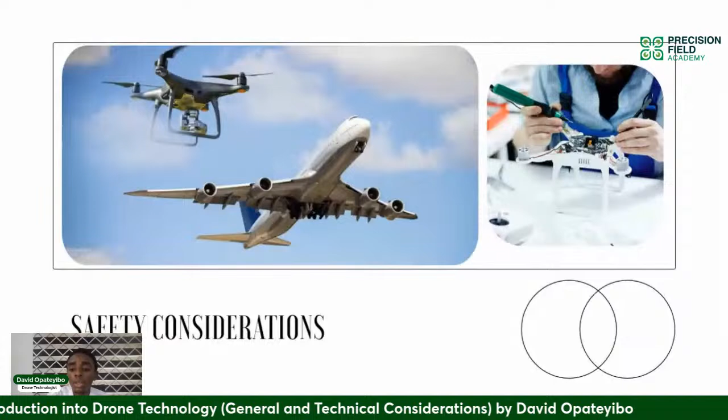While operating your drone, you take care of your drone, not the other way around. So you maintain it, you clean it up, you take it to a repair person to help maintain it periodically, change the batteries when you need to, and don't operate it when it's malfunctioning. Put all that in place, and that will allow you to carry out your operation seamlessly and easily.

That brings us to another topic, the integration of drones in agriculture. As we've been saying, drones have numerous applications in precision agriculture, including crop scouting, disease detection, weed management, and yield estimation. Let's explore some real-world use cases or case studies that demonstrate how drones have been successfully integrated into various agricultural practices, highlighting the improved yield and resource efficiency experienced as a result.

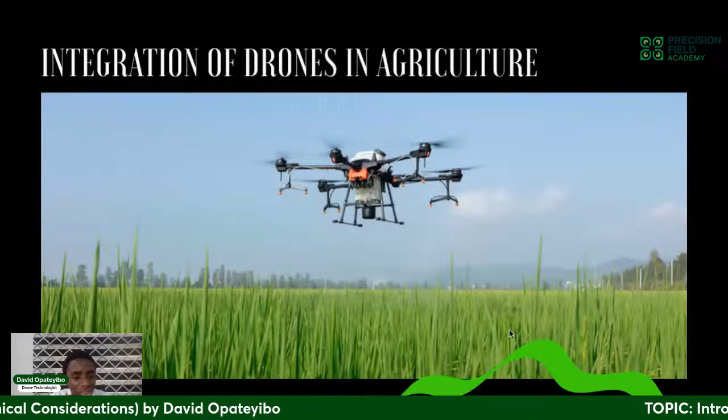We'll start with the first one, coffee plantation management in Brazil. In this use case, a set of coffee growers in Minas Gerais, Brazil, implemented a project in 2018 to enhance coffee quality and optimize cultivation practices, with the purpose of increasing farm productivity. They employed a drone equipped with a thermal imaging camera.

Remember we spoke about different kinds of sensors. In this use case they used a thermal imaging camera to capture canopy temperature, monitoring the temperature and its variation across their coffee plantation. The data they got from this thermal imaging allowed them to estimate the drought stress and adjust irrigation strategies.

Because of the heat data they got, they could identify drought stress, areas where water wasn't reaching, where it wasn't reflecting light as it should versus areas that were green and healthy. So they used that data to understand drought conditions and strategize for irrigation.

It also helped them detect pest infestation in their coffee trees, allowing them to create targeted pest control measures and minimize crop damage. The implementation of drones here allowed them to increase the quality of their coffee production and enhance the reputation of their market value.

Just some few questions. People are actually asking, wishing they were in the class to fly. There are a few questions, let me check, there's so much information. What we have here are not really questions per se, people are just sharing their own thoughts around what you are doing. I think we have some compliments, you could go ahead and share.

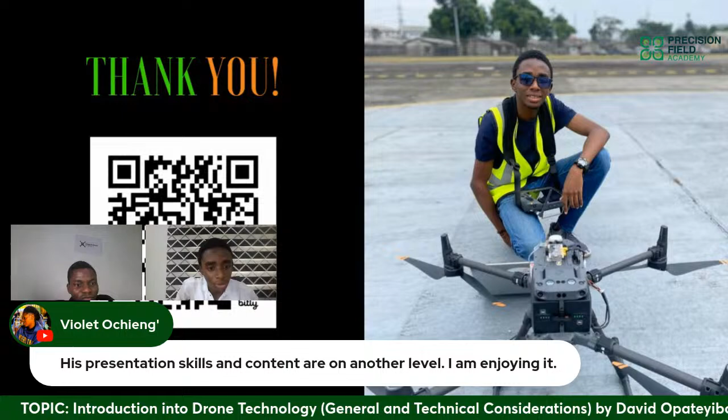Miss Violet Ochieng' said: his presentation skills and content are on another level, I am enjoying it. Thank you. You're welcome.

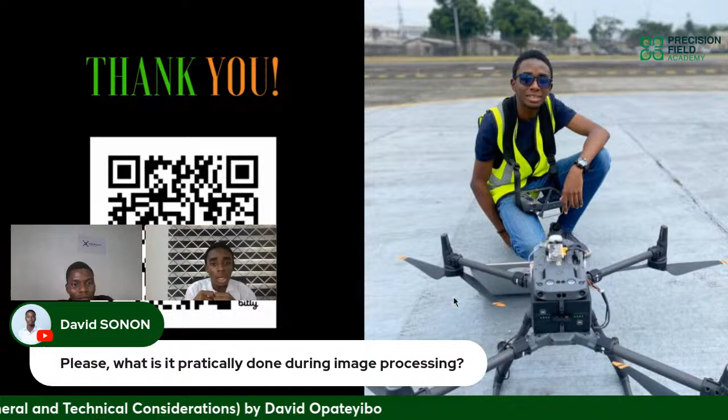No issues. So basically, when carrying out image processing, the very first thing you need to do is capture your data. You have your drone out there - let's say you have a farm, you mark the area, and the drone flies all over the farm. While it's doing that, it's capturing images of the farm intermittently. All these images are individual, singular images.

So when it comes to image processing, what happens is it gathers your images and stitches them together - just like what you have on Google Map, for example. Images captured by satellite are merged together to become just one map. So all those images you captured on your farm, once you take them into the image processing software, it first merges them together.

Once it merges them, you now have a complete picture of your farm. You can have different kinds of outputs - for example, an ortho mosaic, which is a 2D model of the farm. If you're using a LiDAR sensor, you can have a 3D model of that farm, telling you about the height of your crop, the structure of the ground, and many other things.

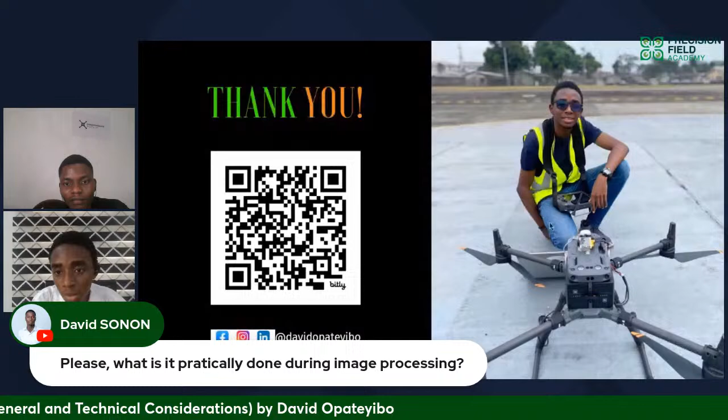Let me share my screen so you understand - just give me a moment.

Sharing my screen now. Can you see my screen? I'm sharing another screen now, can you see that? No, it's not visible yet. Okay.

Okay, need to come on. The screen is not visible yet. Okay, just stand by. All right, so this is one. Can you see it now? Okay. Yes, yes, yes, yes, you can see.

All right, so this is an example of what the drone captured, basically a regular image, more like what your eyes can see, right? Just a picture of the farmland. But now with the aid of a software, you're able to get something like this.

What we have here on the screen now is NDVI, it's like a vegetation index. On this NDVI you can see different colors - you have the green, the yellow, the orange, and the kind of red. Each of these things means something to a data analyst, an agricultural data analyst. From this they can tell which part of your farm needs more water, which part is affected by pests, depending on the vegetation indices, the vegetation data you are getting. And with that, the farmer is able to make the precise decision he needs to make.

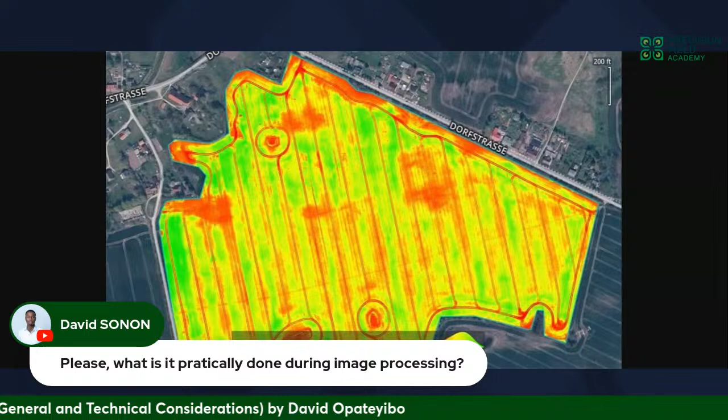So with this, they can plan - for example, this is just a reference. Let's say you have a lot of greens on the screen, it means your farmland is pretty good. Let's say in one area you have a lot of reds - depending on the vegetation index, it could mean there's pest infesting your plants, or maybe water is not getting enough to this area. So let's say you have an irrigation pipeline, but water is not getting to this particular region, then you know you need to create more pipes to cover that issue. So there are a lot of things, but that's what image processing really is - it's all about gathering image and analyzing the image or data to get and make useful decisions.

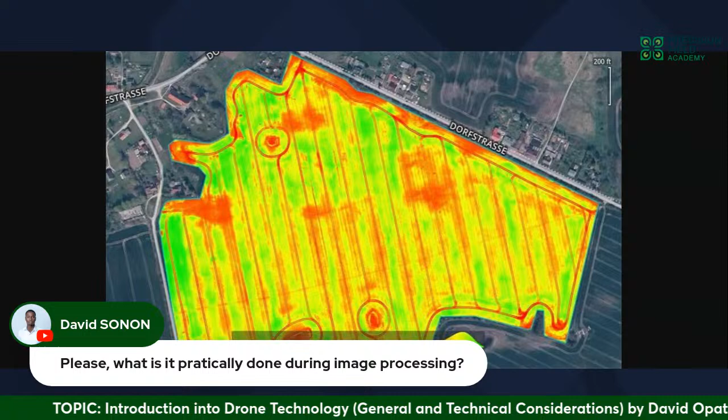Okay, that really makes sense. Thank you for that. Well, insightful answer. So someone is giving a compliment here. So much information, thank you.

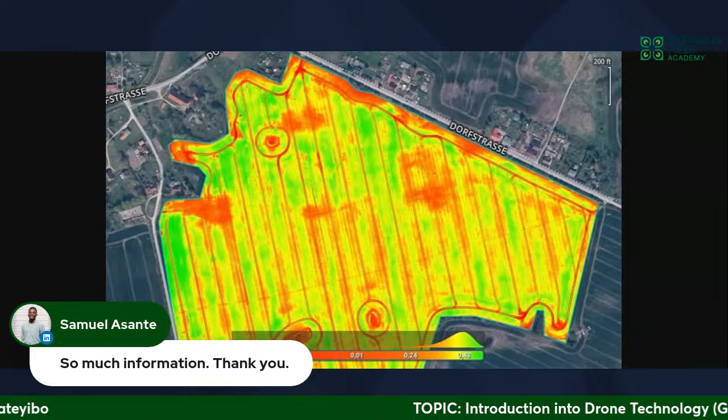So it's just asking basically - am I allowed to share that? Just give your thought around it. It's no problem, learning is easy. For example, this is a platform - Precision Field Academy is a platform that allows you to pretty much learn. With Precision Field Academy, we could connect and talk depending on how things are. But another thing is I am on social media, so you can always follow me on social media if you need to, and then we can have a discussion. But I believe Precision Field Academy - the fact that you are here means you have a lot to learn.

So fixed-wing drones and multi-rotor, which one is better for field layout? I think somebody is talking about maybe field mapping or doing field environment. So he was asking probably to know the efficiency between the fixed wing and the multi-rotor, which one can work best. All right, so basically on a general scale...